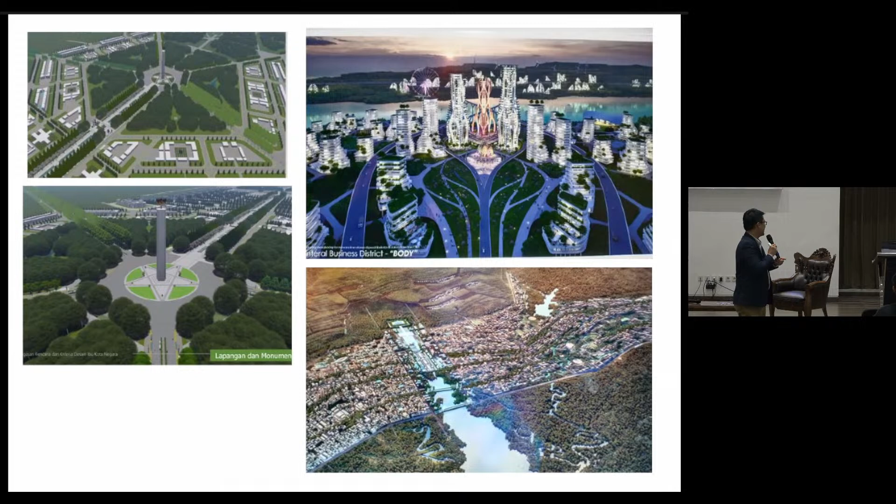Top right is actually a collaboration of Cornell University with some company in China and a university in Semarang, not Undip, the Catholic one, Soegijapranata. But there is Cornell there. And the bottom right is associated with Harvard University.

But who's the winner? Coming from ITB only, Indonesian national. So no help from foreign universities or anybody. So proud, an original national product. We're number 1, number 2 Cornell, number 3 Harvard. Although my master's degree is from New South Wales.

Okay, but what can you tell about number 2 and number 3 and number 1? Anybody want to give some opinion? Can you observe? Can you suspect? What is the difference? The brief is the same. Can you point out what it is? This is like a game, guys. Find the difference between 1, 2, and 3. This one is a huge difference. Any observation? Cannot find?

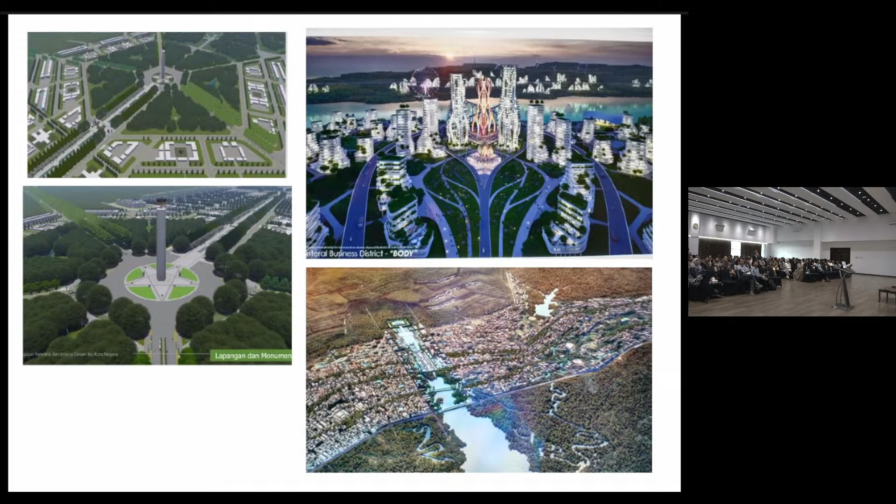Thank you. So if you notice, good observation, the one on the top right is flat, has a river, high rise, right? The one on the bottom is probably undulating, has a river, but very low rise. This design is in between. So this is a lesson that I can relate to all of you. In architecture, the same brief usually ends up with the same volume or the same shape. The design can be different, but the density, height, size, and dimensions are usually the same.

In city planning, the same brief can end up very different. So it means the competition is so open that it can really go for very different solutions. Now, can you tell which one is actually the better solution? And why did the judges select my scheme compared to the other schemes? Because the rendering looks better, probably.

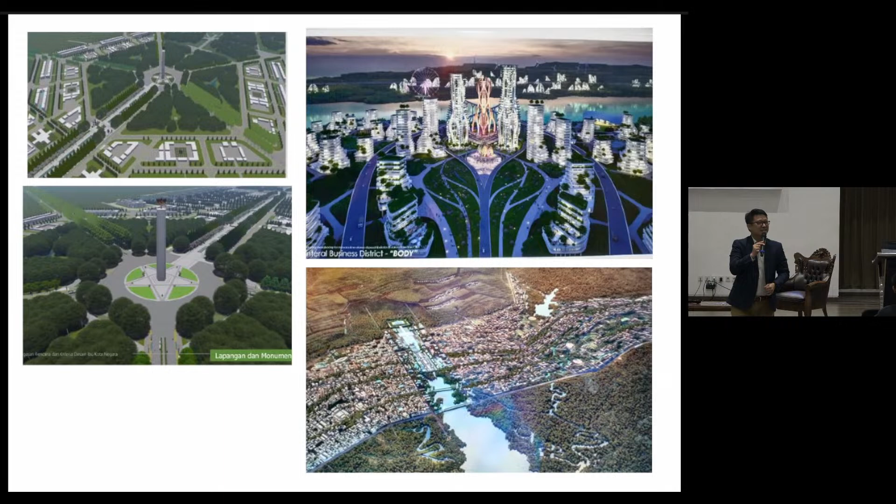Ngaku ya, saya ngaku, I confess. I was in an international company called K.H.A for 11 years. And primarily I spent my time outside. More than half of that 11 years, I was in China and Hong Kong, in India, in Singapore, and doing a lot of projects also in Malaysia. And my specialization is competition.

So when we did the project back then, that rendering was done in 3 days. 3 hari, 6,000 hektar. And the only company on earth that can do that is in China. Indonesia teman-teman kita gak sanggup, dan kita hanya punya 3 hari karena kita pindah, we changed location at the very last minute. As usual, architects are always like that, right?

We procrastinate, we never settle for final in the first week. No, we waited until the very last 2 weeks, we changed location. We changed location because all of us said this is not good. I want to see the ocean, I want to see the access to the bridge. Then we only left 3 days for the renderer. But we paid a very healthy fee for the Chinese consultant to do this rendering. So maybe the rendering helped us win the job.

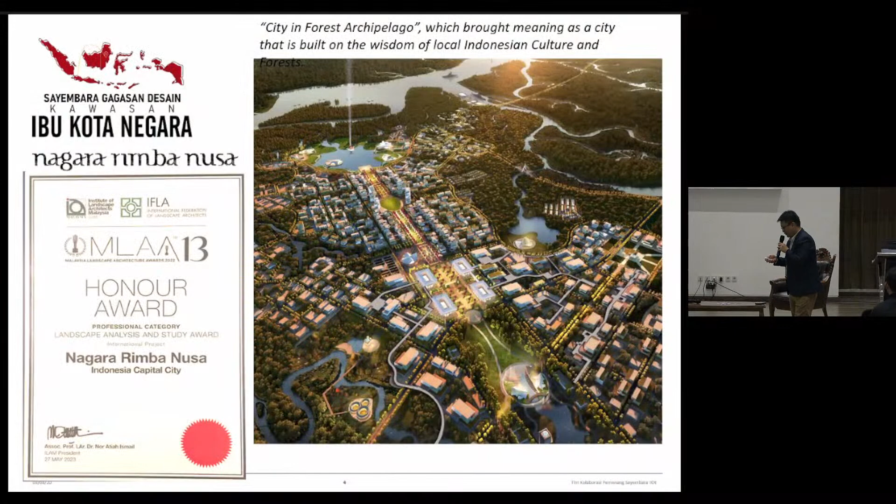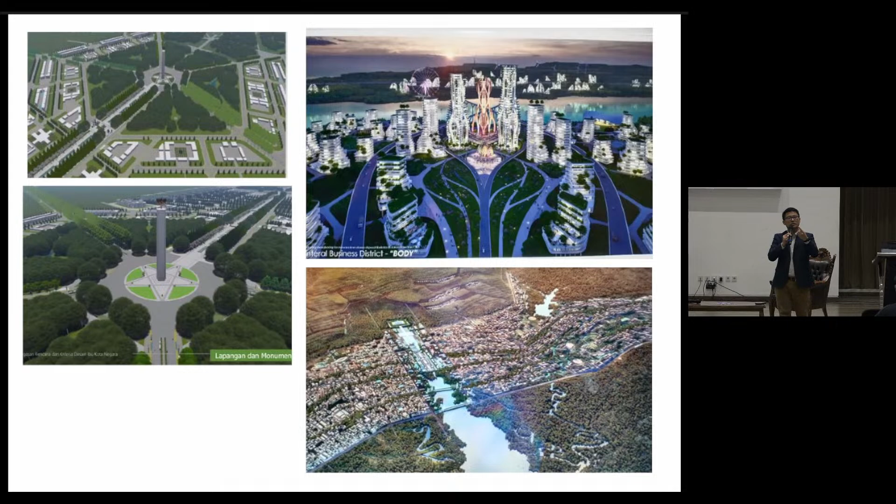But this one is also not bad, actually. So the point is, there are many options in relating to the brief. It doesn't mean it's only one solution. This one can be right too, I don't know. The other one on the top also can be right. We don't know. But our scheme is more about doing a medium density, and I explained to you why we chose medium density over high density or low density. Okay, I need to speed up a bit.

For those who know IKN, it is 240,000 hectares. It's the size of Jabodetabek: Jakarta, Bogor, Depok, Tangerang, Bekasi. There are many cities. Similarly, in IKN, we also have 9 cities. But the very big difference is Jabodetabek has about 34 million people in total, including Jakarta. Here, we only have up to 2 million. If we combine Balikpapan and Samarinda, it becomes almost 4 million. 4 million versus 34 million, very different. So we are not building Jakarta here.

We are building multiple cities: government center, economic center, health services, entertainment, education, innovation, agriculture, farming, and high-tech industry in multiple locations. And somebody may ask, why don't we build here or there? This one is mostly an area of mangrove, Teluk Balikpapan. This area, from the Suharto time, is called Bukit Suharto, a protected forest that cannot be touched. It's a national forest. It means 70% of the whole area is actually located here.

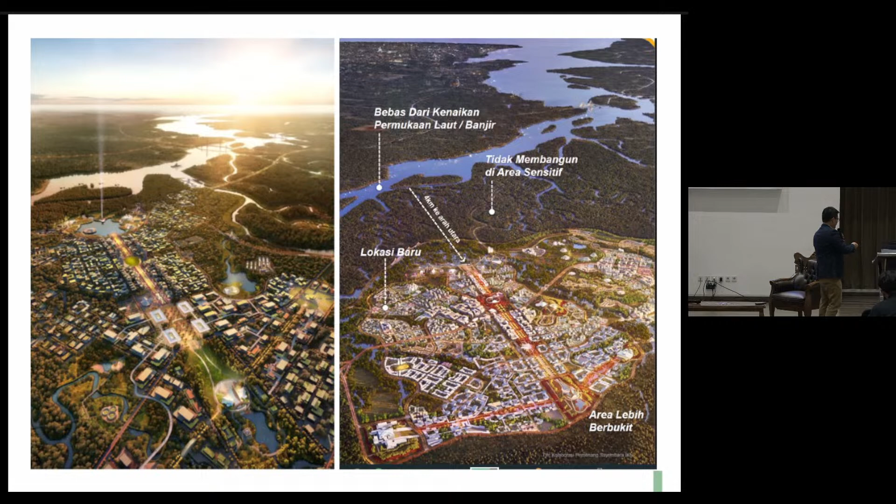So imagine my COVID quarantine time, I had to deal with all these changes, like you make an impossible city, right? So this is the thesis of my discussion. There are two, and if we have time, probably three. How to interpret the vision, the goals, and the targets. How to respond to nature and the context. What will be the model for urban development of IKN? How can we meet all the KPIs, although they're contradictory? I come back to the contradiction.

If you want to be closely located for 10 minutes and have efficient public transport, you cannot have more open space. If you want more open space, you're bound to be disconnected or segmented, right? So all this contradiction is the question that I have to answer.

And then to make it worse, that's the landing station of Pak Presiden. That's Pak Jokowi here. These are all the ministers. This is Ibu Dirjen. This is Pak Menteri, Pak Basuki, and he's pointing to this hill: that's my palace. Because from there, I can see Jembatan Balang is actually located there. This elevation is 110. The helipad is at 110. The palace is at 90.

The whole area here is like a bulldog. You know the skin of the bulldog? Kriwilan, bumps, like crazy. Every 100 meters, you go 30 meters up or 20 meters down, everywhere. So we ended up with a solution: first, we come back to our credo that we have to respond to nature. We have to be sensitive to the environment. How? We have to at least identify the high points and the low points. So never in the history of urban planning have we started from scratch.

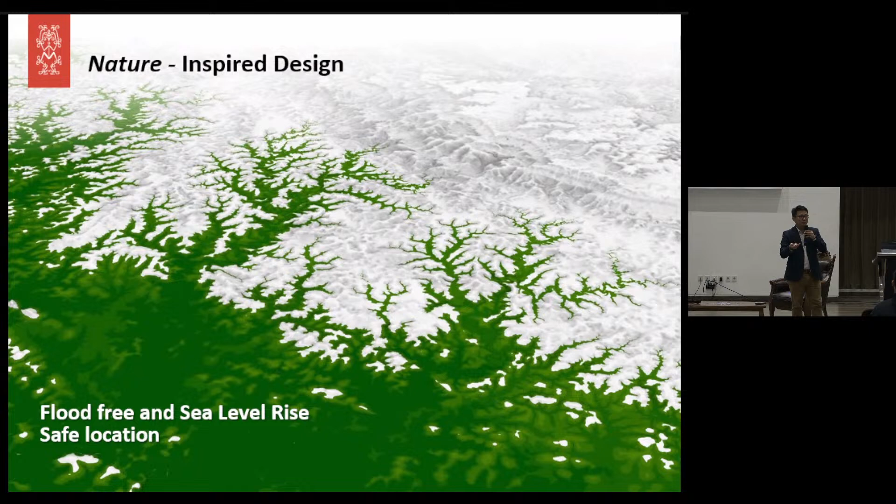This is the first time we painfully identify the main river, the secondary river, the tertiary river, even to the four category of what we call the vein or serabut sungai. It doesn't have any water, but it is an area that we don't touch. And that also has consequence to the road system.

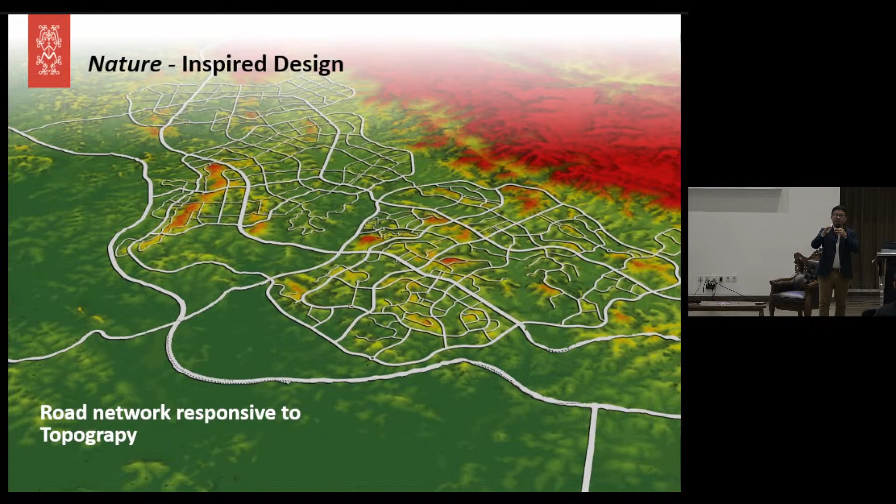We cannot draw straight lines. We can, but we're forcing it. So most of the roads are wiggly like this. Even this road right now has already become very wrinkly. Why? Because every time you go straight, you hit the hill, you have to go around it. You cannot cut the hill. If you go down too deep, you have to build a bridge. So if you really want to avoid unnecessary cut and fill on this...

That's why the road system is very undulating. But then, what is a capital city without the structure? We need to have structures. We start to have at least the axis, because the president already pointed out this location. He was here during the helicopter ride, and he looked down to here.

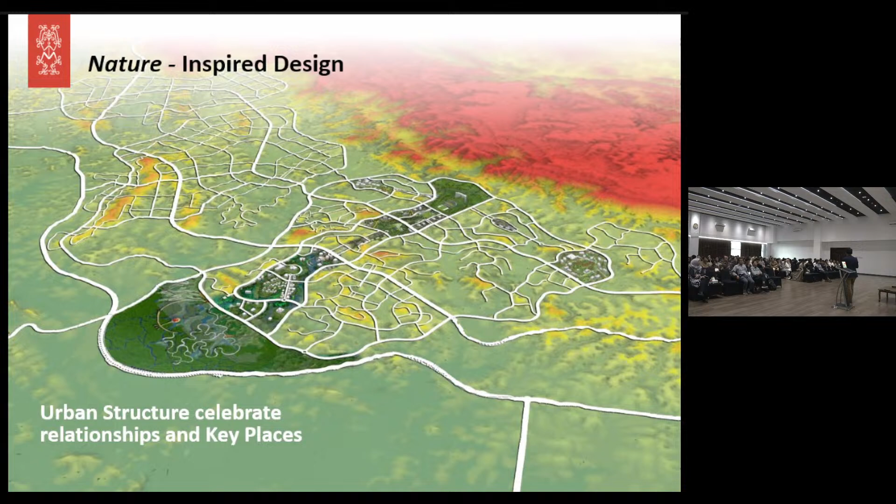And then we have to do an axis, because in our Nagara Rimba Nusa scheme, one of our features is the axis. If you look at this tradition of capital cities all over the world, it has an axis. But this is not copying from outside. In Yogyakarta, we have a philosophical axis from Merapi to Kraton and even to the Southern Sea, Laut Selatan. Bali also has that in Mount Agung. Bandung also has that in Tangkuban Perahu.

In many various cities of Indonesia, this is a relationship between man, nature, and the higher being. We call it God, but some people think it's not necessarily God, because in the past it wasn't really God, it's also the element or force of nature that you cannot control, something higher, beyond human, that really needs to be acknowledged. Although in our capital city we don't have a mountain, we have the hill behind us, which is an elevation of 200.

So we built this in one location we already know. Pak Presiden wants the palace to be there. We relate it to the ocean, this is the Teluk Balikpapan. This one is actually a wetland, and anything in between is where man is supposed to come in between nature and God, and really try to set a balance between how man treats nature and how man relates to God. So that's the axis that we want to build.

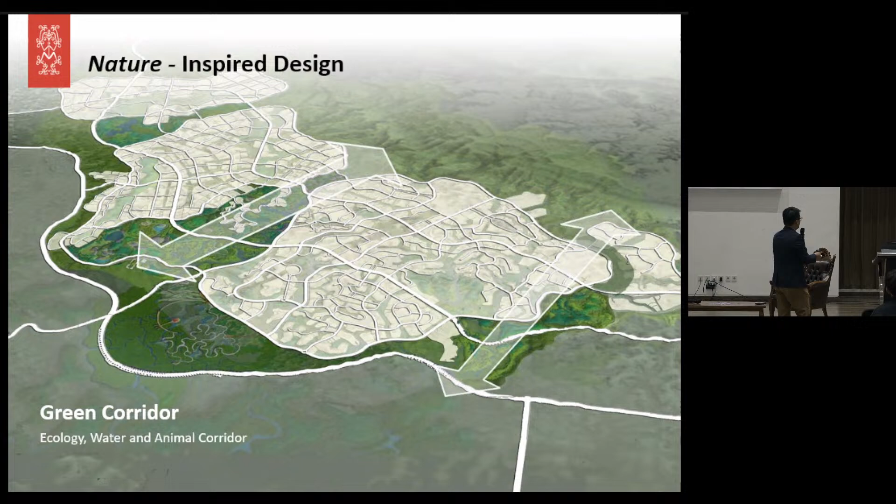Because remember, we need to be side by side with the snakes, the monkeys, the biawak. Do you want to be too close to them? Maybe not, right? So we add at least a 100-meter wide corridor to allow the animals not to be disturbed by us. By right it should be 300 meters, but we don't have the space. We need to build a town for 300,000 people in only 30% of this very precious area. And not to mention, the area is very undulating, so a lot of it cannot be built.

And remember, we also try to remember the first nerve system of the water. We painfully identify this area that we don't build on.

In the city of Jakarta, even Yogyakarta, you can only have probably the primary and secondary river. The tertiary and fourth level is usually gone - we fill it up and use an irrigation channel. Jakarta lost their tertiary river since the 1970s or 1980s. I don't know about Yogyakarta, but Bali is already losing that. From here, we define and protect even the fourth level of river.

Which you will later see how crazy we are doing that, because it drives us nuts also doing that. But remember, we have to do 30% developed area and 70% green area. The 70% is made up by the big corridor of nature and also the small little corridors of what we call the green and blue fingers.

And remember, there's another KPI about 2 degrees Celsius. Can you guess the relationship between the 2 degrees Celsius and these green fingers? And also the 10-minute city, because the 10-minute city suggests that you also have to achieve not only Indomaret, but also the park. So can anybody guess the relationship between the reduction of temperature and this network of fingers?

Kira-kira ada yang ide? Saya kasih USB deh. USB isinya file presentasi saya.

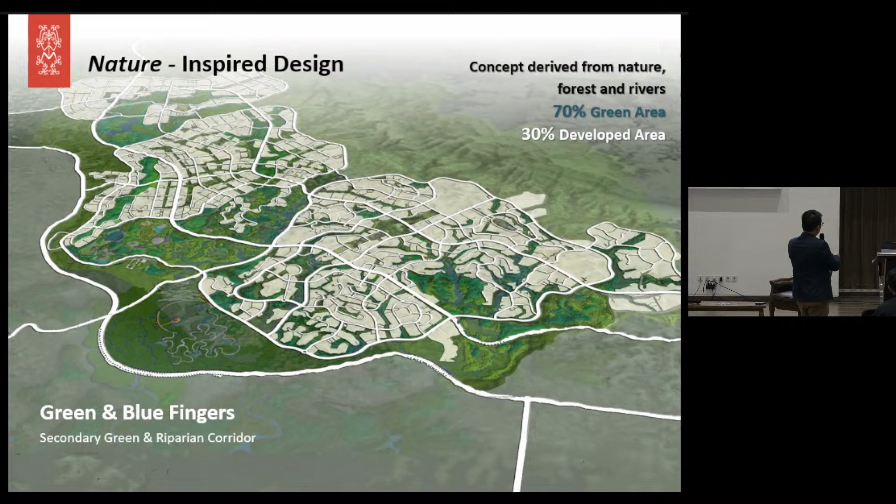No answers? Okay, so these fingers are the manifestation of our archipelago idea. When you are on the island, what do you feel? When you are on the coast of the island, on the beach, what do you feel first? Breeze, right? Yes, the winds. So if we surround our yellow development area with a lot of this green, imagine the green also carries oxygen, carries the water, and allows the breeze to flow.

So it helps to ventilate the city in hope of reducing the temperature by 2 degrees. I cannot answer exactly whether it will be 2 degrees or not, because this temperature can be 40 degrees Celsius as we speak now. With additional buildings, it could be even 42. We don't know. But with this system of what we call the green fingers, hopefully it can drop the temperature by at least 2 degrees.

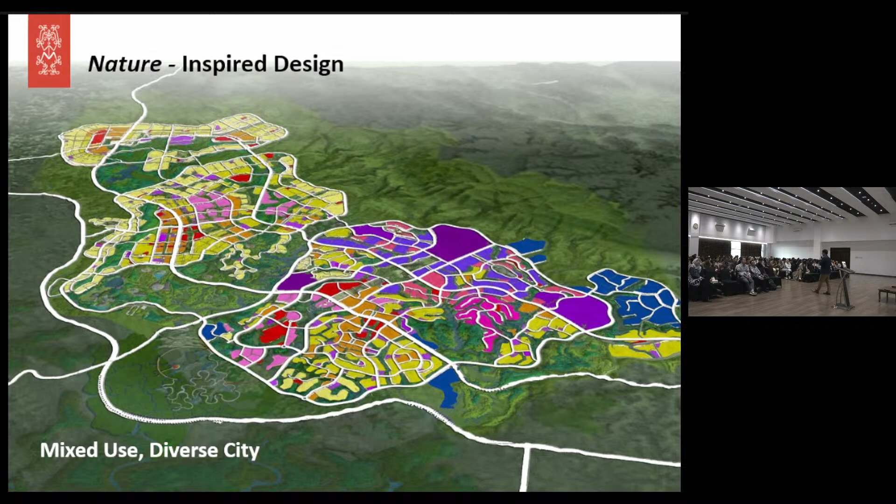And then the next move is the mixed-use diverse city. This is what we call a land use that is mixed. Usually in planning, in the zoning - zonasi, teknik zonasi di PWK - we separate between the living, which is yellow, and the working. Working is usually far away. We live, for example, work in Jakarta, but live in Bogor, live in Depok, live in Serpong.

In here, this is the palace, this is the government center. The yellow one is really next to each other. This is something you notice in all capital cities in the world - the first criticism of the capital city is about how soulless it is. If you go to Canberra, boring, it's like nobody is there, especially after office hours. All the government people move out from the government precinct and the area becomes dead. You go to Putrajaya, very empty during the day and during the night time. The living place is busy, but the government center is very empty.

So in here, we try to mix, and we also try to break the tradition of not having residential too close to the government center, because the government center usually has a lot of restrictions - you cannot go there because we have a lot of secrets, a lot of safety issues, we don't want you near us. But I'm not from the government, so I take the liberty of mixing them, so you have houses near your ministry office. How about that? And now they are building it, so I don't know whether they realize it or not, that actually I'm mixing the residential more - but for a reasonable purpose, trying to bring life to the area that is very government-centric.

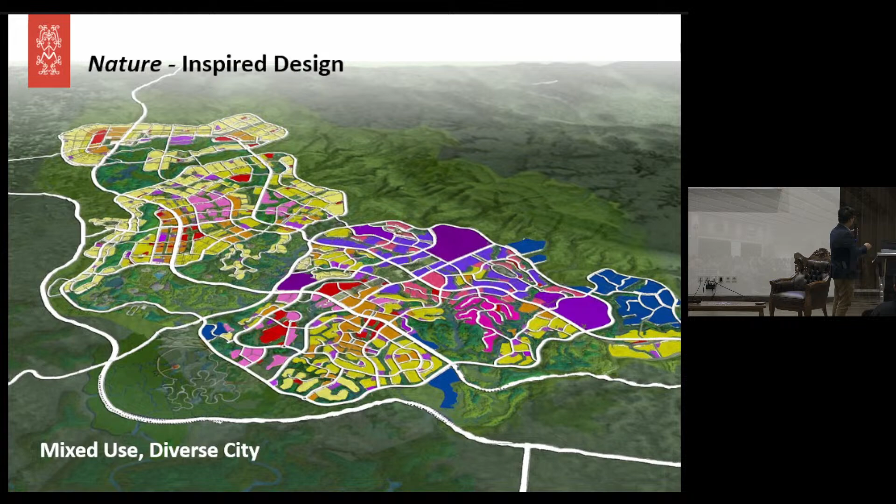Hopefully within 10 minutes, you can go from office to home, or vice versa, or if you're near the commercial center. This is where the contradiction I was talking about comes in: 70% green area, 10-minute basic facility access, 500-meter walking distance to transit, 80% public transport modal share by 2045.

How can you achieve that if you have 70% green area but it's so separated? So we came up with the idea of striking a balance between density and optimal walking distance to transit. We really put a lot of emphasis on public transport, putting in a busway system that reaches all areas of living and working.

Then we put in the transit nodes, where the bus stops are. There are hundreds of bus stops in the capital city, and each bus stop has a 10-minute city radius that is walkable. In the capital city, in Jakarta, on flat ground, or in Yogyakarta, 10 minutes, how far can you go?

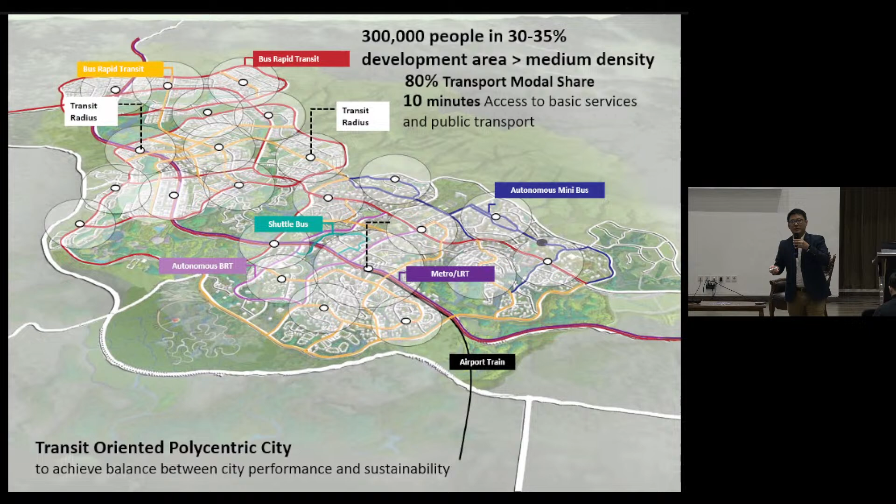But in our capital city, which is undulating like crazy, we can only walk 200 meters. So the radius becomes very constricted, meaning we have to have more public transport points.

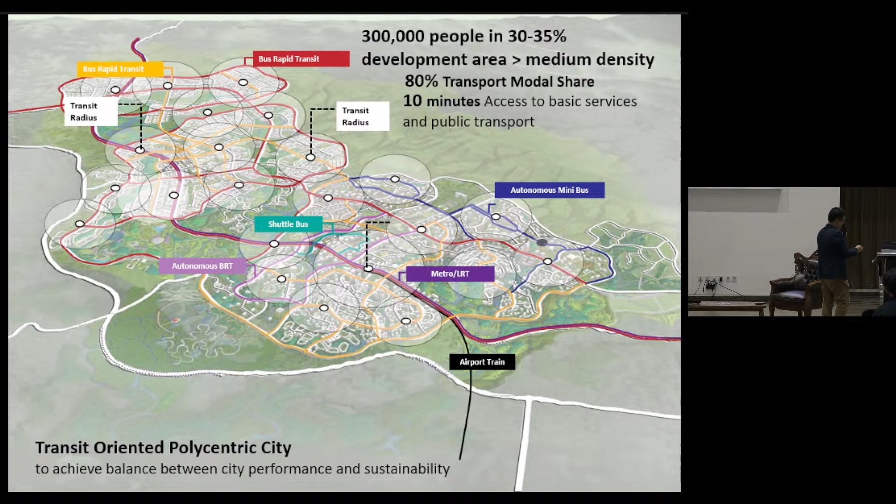How do we make it work with density? In the principle of transit-oriented development, you densify around public transport. You put more people near transit than if they are far away. It means you cannot make it suburbia.

Remember the third winning option? The third winner is very flat, like 2-story, 3-story buildings all over the place. We cannot do that because we need to build density.

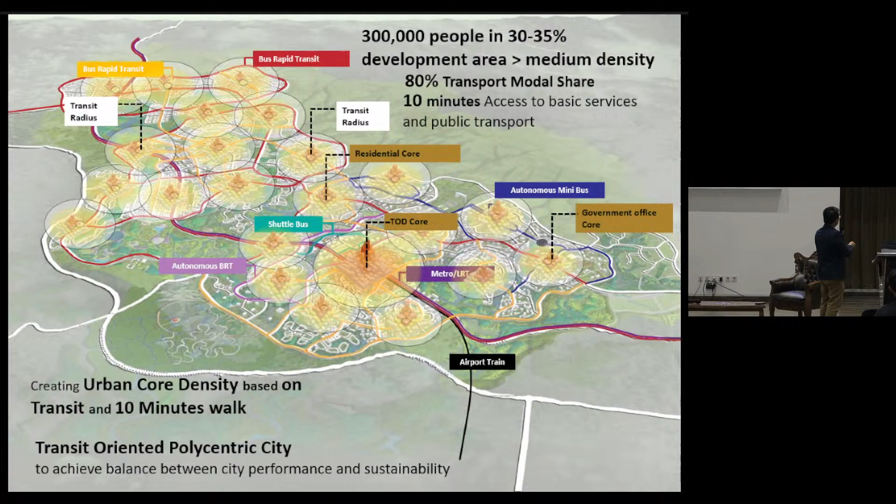So we are building density around the transit, and we call it 10-minute clusters or livable clusters that allow people to walk more, bicycle more, use public transport, and use cars only as a last resort. We also have to connect the bus station to the living area, the working area, and the mixed-use area using direct pedestrian bridges, because the area is very undulating.

Just to add to the third pillar of the vision, you have to be smart. We can't show too much of this, but the discussion this morning talked about integrating a platform for commanding and controlling the city using an integrated model, almost like a BIM, but at the city level. So we call it not BIM, but CIM, City Integrated Model.

It needs to be big, covering the whole city. It needs to be almost what we call a digital twin. In Singapore, they already started to mirror their city, put it into a model, and monitor the performance of each area of the city from wherever they are.

Here, we don't have the city yet — we are building the city. It means we have to start very early, putting everything into a digital platform, making sure every single movement is recorded and integrated into the platform.

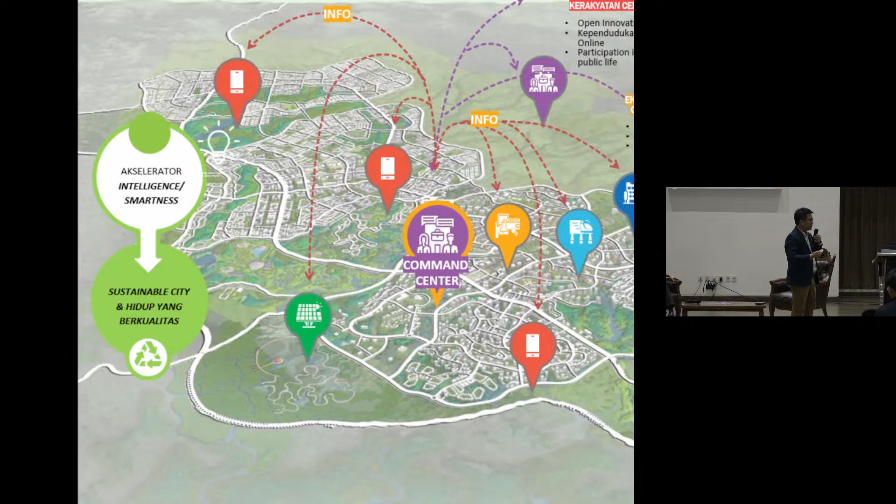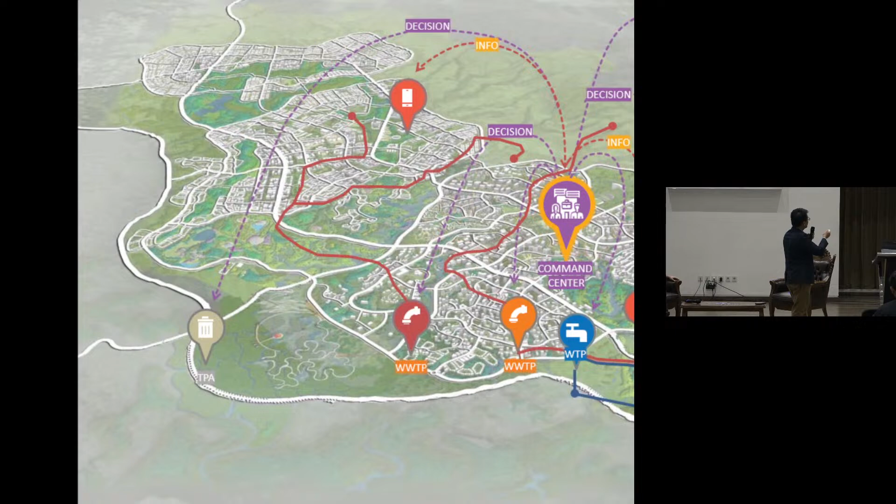The performance of the building, the water, the infrastructure, the energy, the waste — all monitored and controlled from one point of location. Especially the transportation system, because our KPI is translated based on the movement of people by public transport.

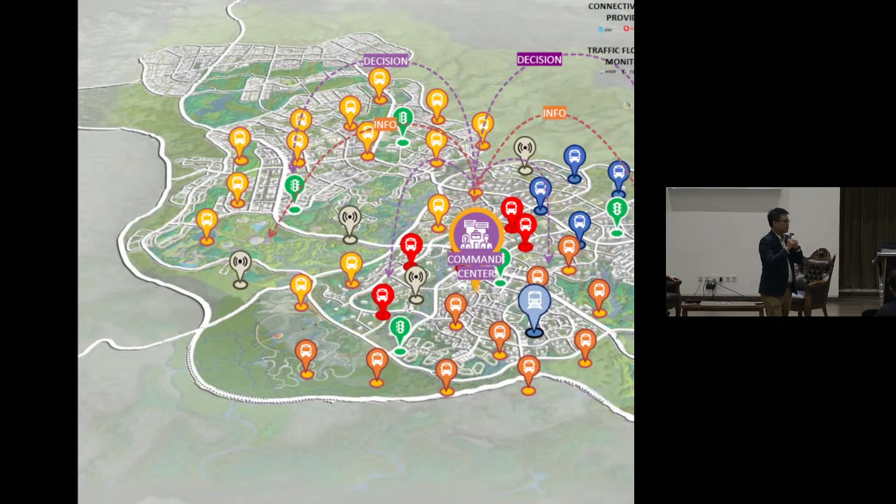If it's measured by public transport, it means it needs to be reliable. What is the bad thing about our public transport?

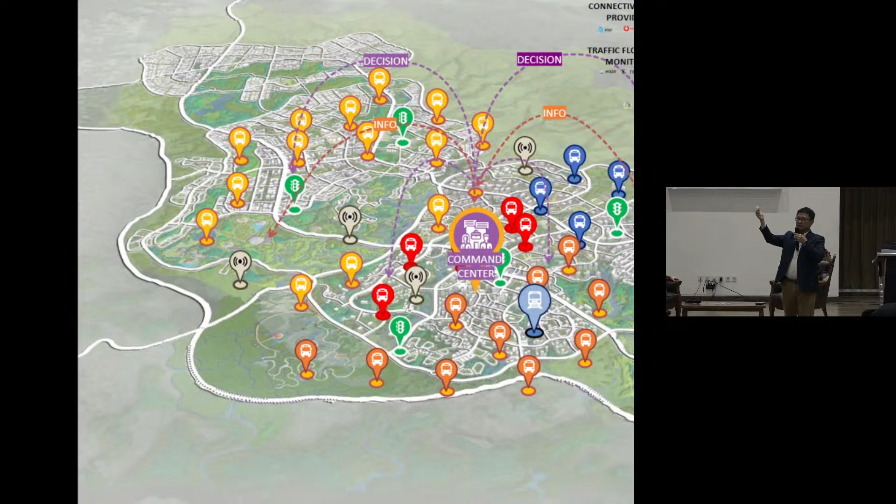Because that's the age of the smart city in the future. You just don't let the car move around endlessly without knowing how many people are going to use it or not. If everybody is using apps and they start to say, I need the bus in this location, there are more people. Especially they can learn; they have machine learning to know the pattern every day, like, oh, the government people in this block usually come from 7 to 7:30, and they will leave back again from their offices about 5 o'clock. The bus system can adjust to that requirement. So that's the age of our capital city in the future.

So smart forest city, archipelago-based future city model as a transformation and symbol of civilization advancement of Indonesia. Now,

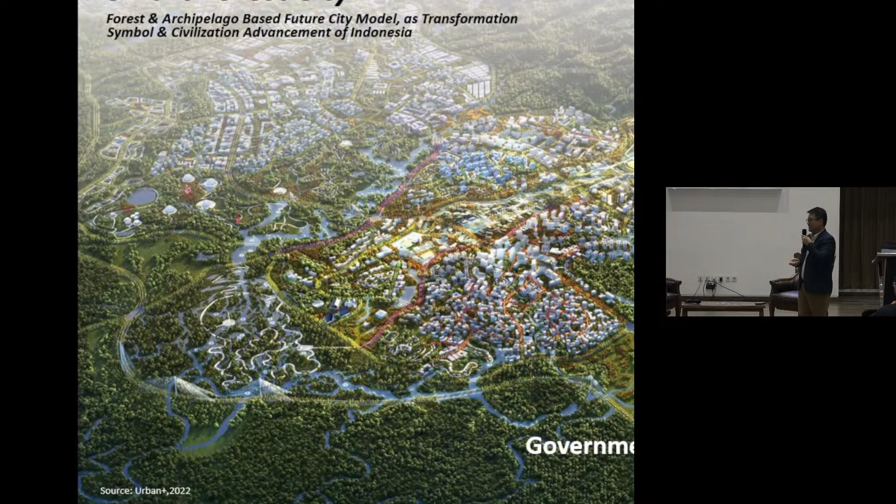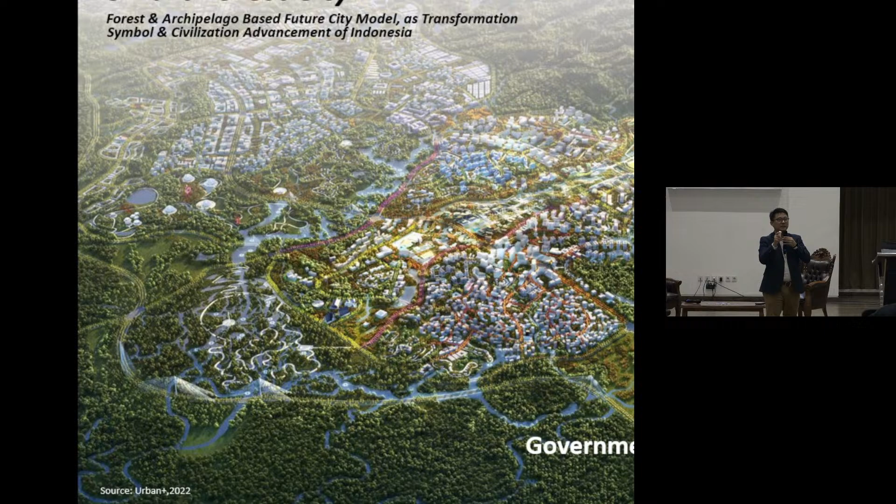Yeah, okay. Just now we talked about the big scale. Now let's talk about the building blocks, something that relates to architecture a bit more. How to design a sustainable urban form that really pushes the thinking forward. Even the words biomimicry and biophilia are already coming. This is what we call the nature-based solution approach to the city and to the architecture that really tries to be inspired by the forest.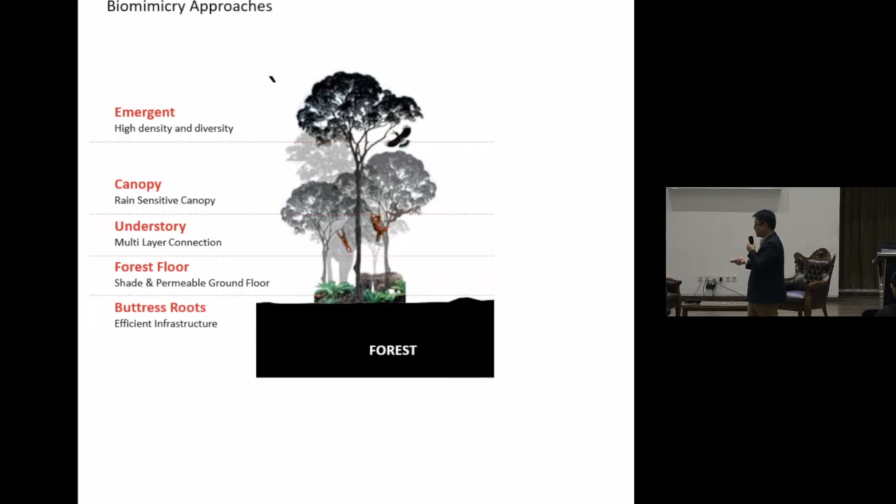So not only the park, we're talking about forest. It means it has big trees, it has small trees, it has monkeys, it has birds, it has squirrels, it has the snakes, and we also have the system of buttress roots, forest floor, understory, canopy, and emergent. What we tried to push forward at that time, although the implementation may not be like that, but that's the challenge, is to really try to emulate nature into the city fabric.

Try to see the tower of the building as if it is a tree. Looking at the people as if they are the monkeys and the squirrels. How do they move from one to another? Does a monkey go down to the bottom of the building, get checked by the satpam, go out and then go to the other one? They go from one building to another by swinging from one tower to another. Why don't we create bridges between the buildings so I can connect from this building to the next building without even going down to the ground floor?

Break that boundary. Add more solar panels on every rooftop of the building as if they are the emergent tall trees. This is where the biggest trees are, because they have the biggest capacity to absorb the sun's energy. This is the trunk. The trunk takes all the water, the nutrients, the sap from the ground very efficiently. Can we make a very efficient vertical core of the building that can not only take people, but can also take water, energy, information, logistics? Goods can be transferred from top to bottom.

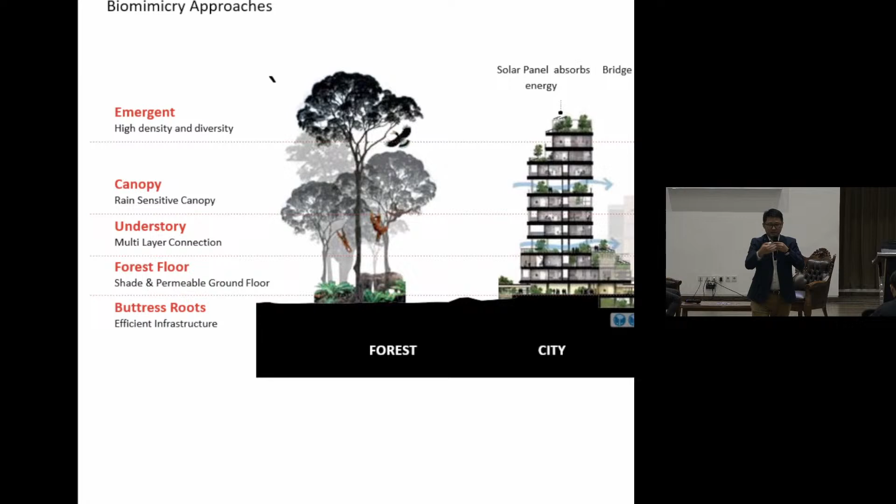The bottom of the forest is where it is most diverse. By the forest diversity index, they are not diverse at the top. They are the most diverse at the bottom. More species are located at the bottom of the forest, not in the middle or the upper. Yeah? So can we bring more people, more activity at the ground level, and also allow the water, the wind, the animals to move freely from one place to another?

And yet, the root doesn't care whether you are on the hill, it doesn't care whether you are on the slope, it doesn't care whether you are on the water. It grows, it adapts, it connects from one to another. So why don't we adapt to this contour by creating multiple layers of pedestrian connection that can connect directly, but also help carry people from one place to another, although they have to go up and down. And this is not the first time; Indonesians in the past also adapted to that.

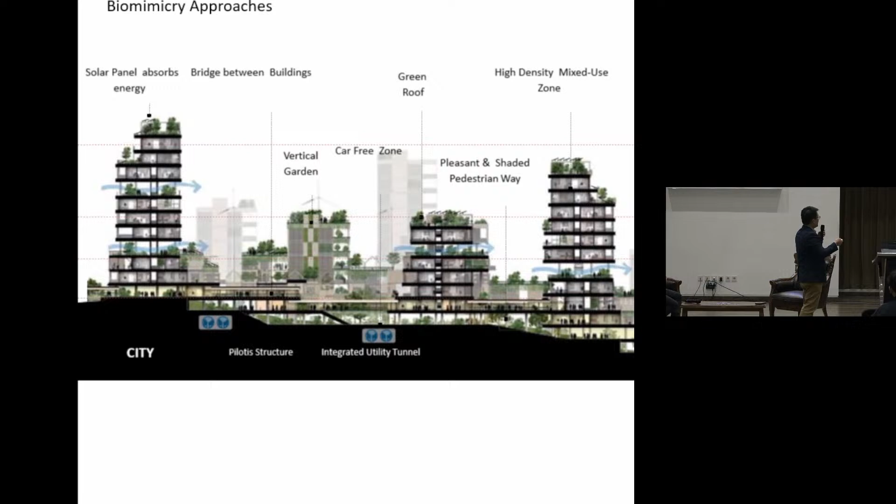This is the Rumah Panjang of Kalimantan. But the Padang people also have this. Aceh also has this. Toraja also has this. It's our Nusantara architecture. Our past vernacular wisdom of architecture gave us the clue on how to build in response to nature, allowing man to live on safe ground and the animals and nature to also occupy the bottom by using stilts. So we can also mimic using stilts, so we have less impact on the ground, less building footprint, but then we float, allowing the wind and the water to pass through, allowing also the temperature to go down.

So I'm going to tell you about the first block of the building in the capital city, which is the ministry building, where we have these 5 principles. First, we make the ministry building adaptive to the contour and multi-access. So you look at all the buildings here, they have to be built on the slope. Yeah, we use stilts. We build on the slope.

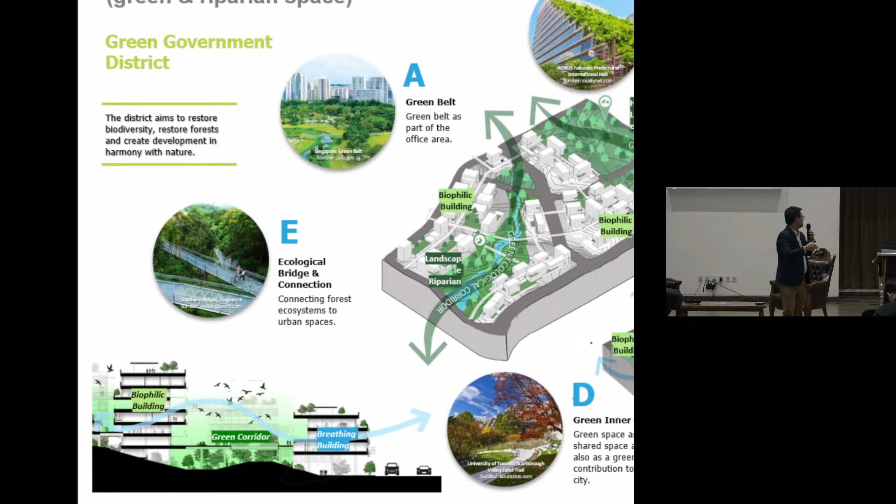We allow the corridor. Remember the finger, the green finger, passing through the blocks. This is where the water, the animals, the wind pass through. If we lift up the building using the pilotis, we call it pilotis, yeah? Then the wind can move freely from one area to another. So the building is not like a typical shopping mall where you isolate your facade and put all the air conditioning. So you allow the breeze to come in and out. And we can model this. I can show you later.

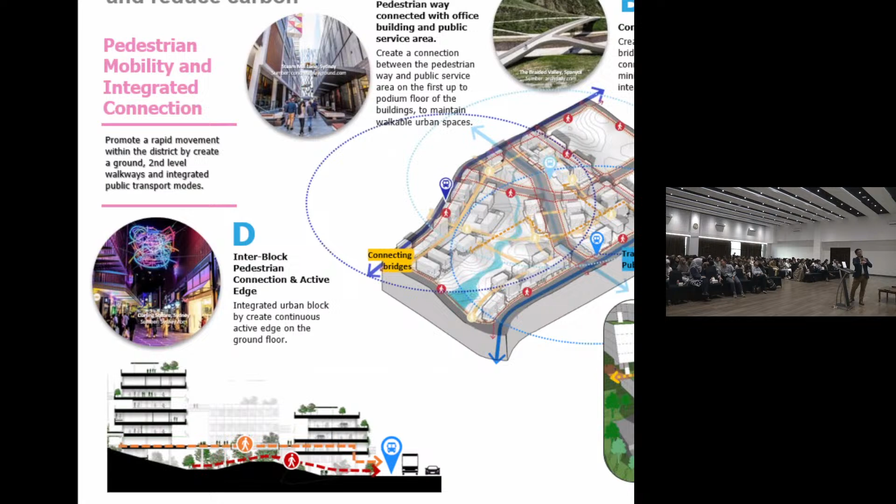And then we interconnect 3-dimensionally, not only using the ground level, but we connect from the bus to the second level that can take you to the ground level of the higher area at the back. Because you have a building that's probably 5 meters or 10 meters behind you that is taller than the first one in the front. And by lifting up the ground, people can move freely at the base, but also people can move from the second level connection. And this is what we call the 100 to 200 meter radius from the bus station.

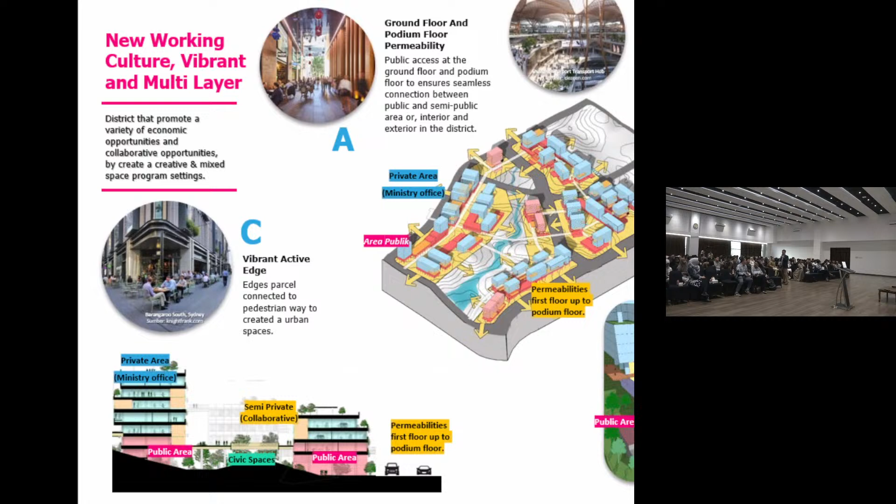Why are people lazy to walk in Indonesia? Sun, hot, rainy. That's the number one. Second one, naik tangga, going up elevation, males. Third, can somebody guess? The quality of the pathway is not good. If we can do the quality, especially if the lady in high heels can walk, it means you're good, right?

It means friendly to the asosiasi dengan high heels association. I don't say only women, yeah. It can be men too nowadays.

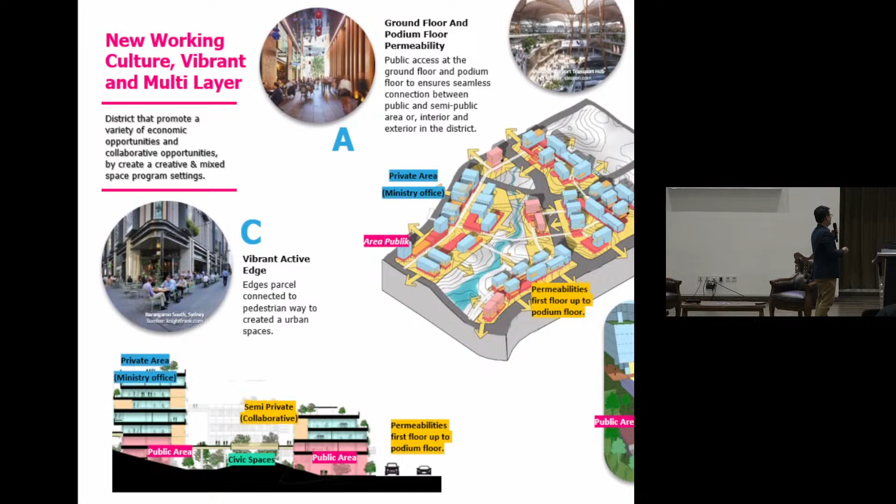So this is the architectural expression of the building after that. We have about 6 to 8 story buildings. The ground level is open, has as much penetration as possible, allowing the green and the wind to pass through. The public function is at the bottom, the semi-public at the second and the third level. The upper level is for the government.

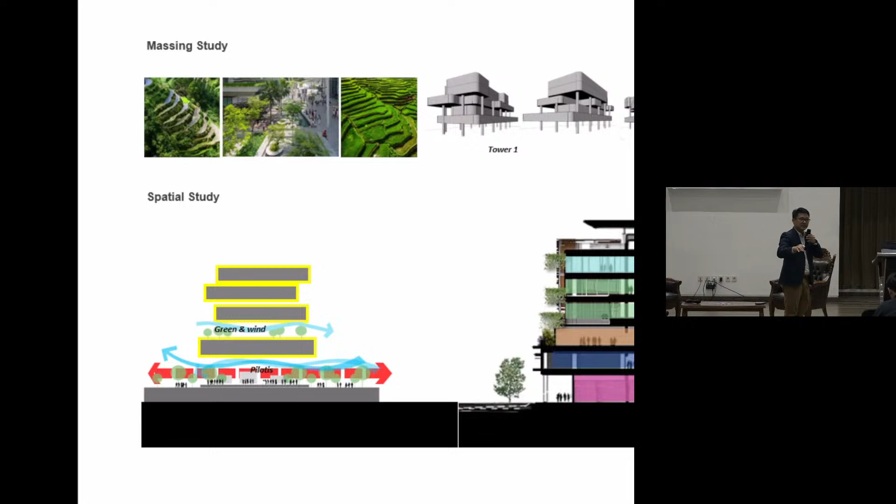We acknowledge the use of the government that is more private. They need to have a lot of secrets, a lot of protected data. But it doesn't mean you close from the bottom ground. You can allow the higher floor to be government zone, but the bottom floor and the second and the first can be liberated. And then in the Ministry of Kemenko, we also start to use the terracing of the paddy to be the inspiration of our architectural blocks.

Now let's see the manifestation of that into a design, ya. Musiknya kayaknya ada tuh.

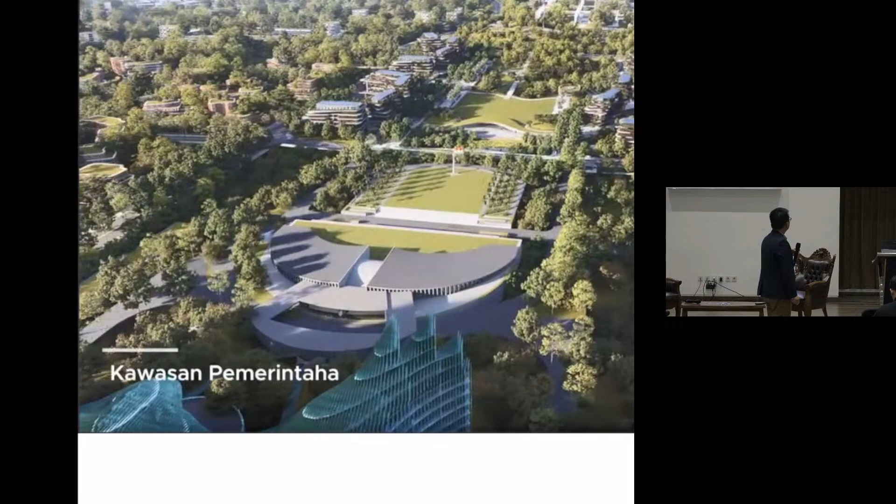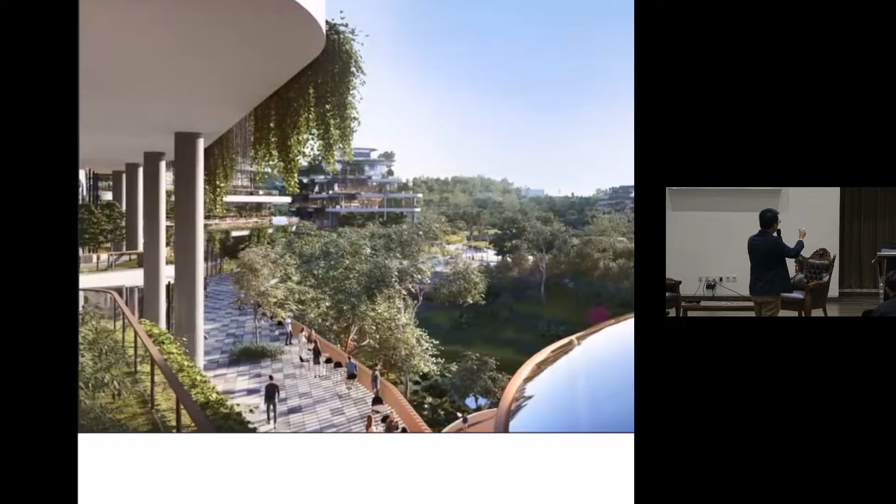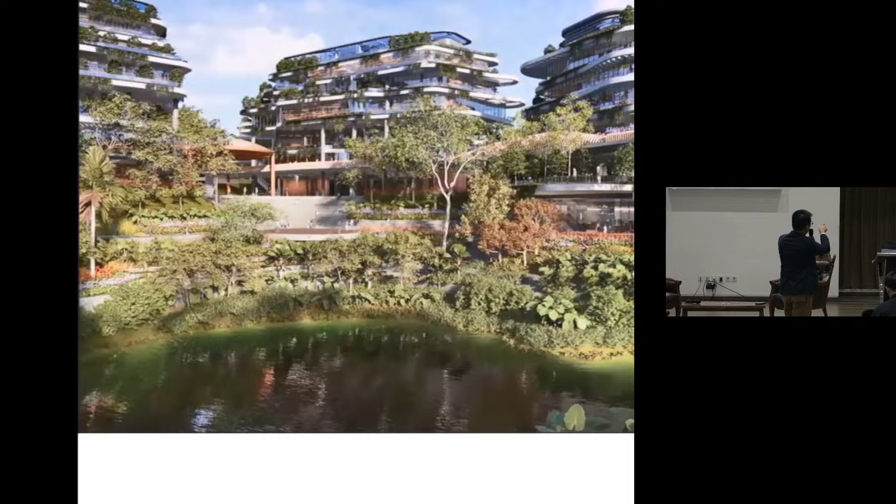So this is the 4 Kemenko that is undergoing right now. If you can see, the building has a lot of cantilever, a lot of integration between the green and the walkway. The walkway is on the second floor. The base of the ground level is open. People can connect from one to another. There is water, remember the water finger, the green finger and the blue finger. The ground level is also open to public. The connectivity happens on the second and the third floor.

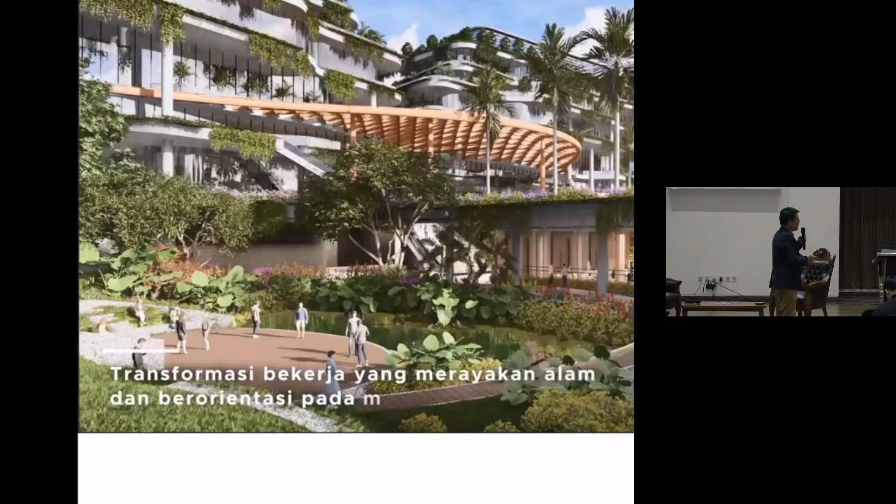We use a lot of openings. We use a lot of shading because we need to reduce the use of air conditioning. We use a lot of openings to let the wind come in. We use a lot of wooden or timber material. And we also use a lot of

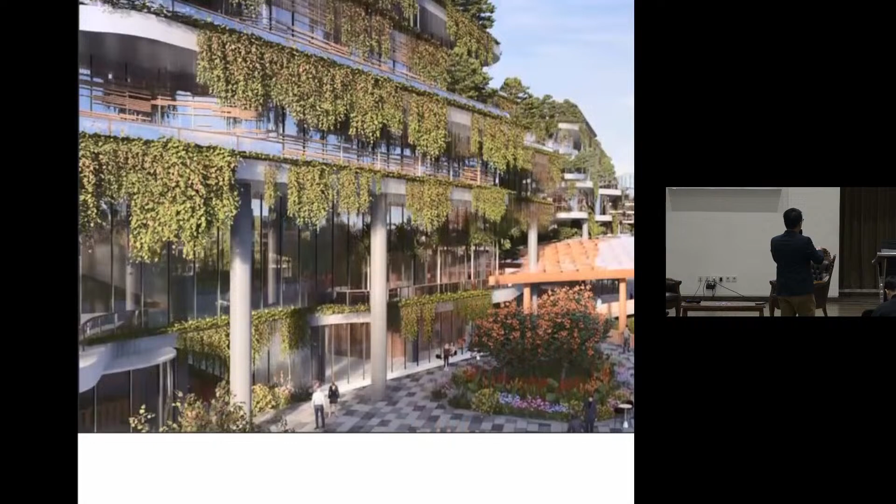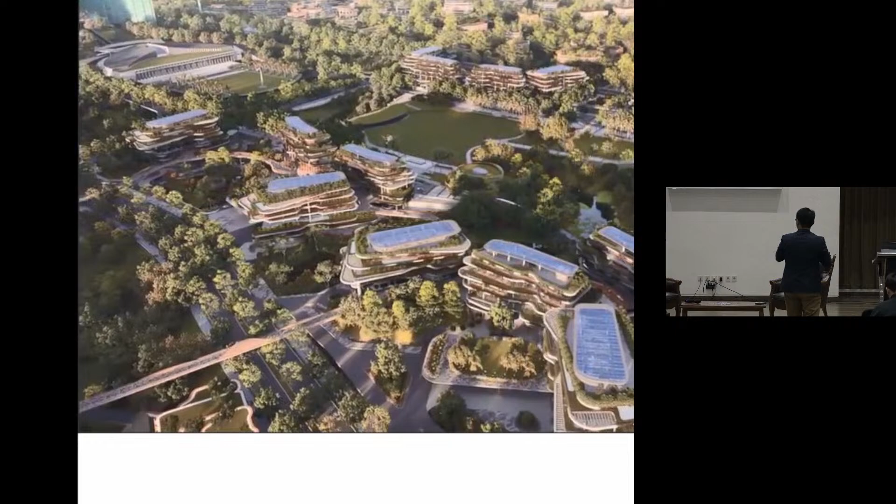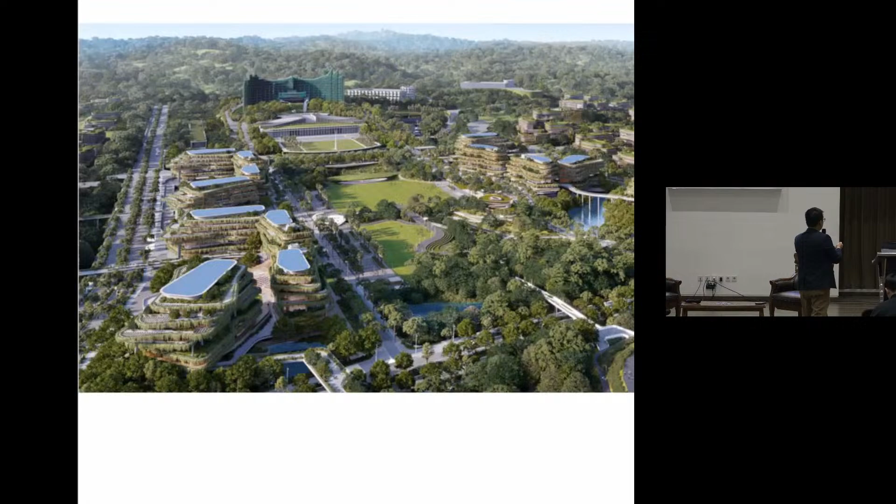sun shading, the facade, like in the past we have, ini ya, apa? Teralis gitu ya, bukan teralis ya. Tritisan atau apa ya? Itu loh Pak. Second skin, ya, the second skin usually made from timber that has the louver, ya, jalousie. So that's also our traditional architecture feature that can be used in the modern form. So from that, it starts to be built like that, and I'll show you later.

Do we have more time? You still want to continue to the next level? Ini SKS ke terakhir nih. 4. Bisa Pak? Okay, now this is the last piece of the presentation. After this, all of you can take a certificate. Lulus jadi urban design. This is the heaviest part though.

The first KPI that you saw in the very first slide has all the numbers. It's very specific: 80% public transport, 10-minute city, 2 degrees of temperature reduction, and it's mandated by law. We as professionals, we are not politicians, ya. We cannot just promise, Pak, 10 menit saya jamin. I can guarantee you 10 minutes if you elect me, right? I can guarantee it's a livable city, pasti bagus. That's not science, that's not us.

We are professionals, we are academics, we have to be using the tools that are available in our era, using parametric and modeling tools to guide the built forms and to guide the development of today that can also reach to the future. Because I can tell you, 100% alternative energy is not doable in today's world. We cannot do 100% yet. We are so dependent on fossil fuels until today. There's also another diabolical situation.

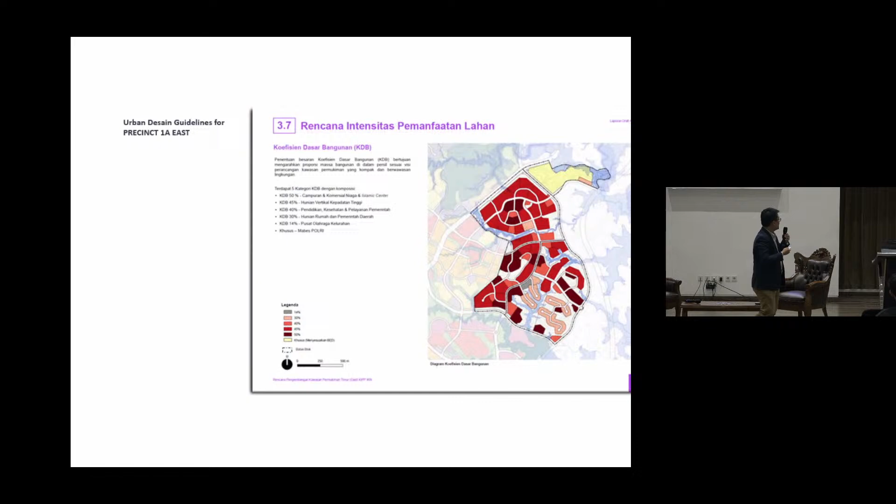So one of the options is to create urban design guidelines that are also performance-based. So this is UDGL. If that's 6,000 hectares, we divide it into about 17 small areas. We call them precincts. Each of these is about 250 hectares. Each is guided by the principle, guided by how much the density, just like a typical RDTR, or RTBL.

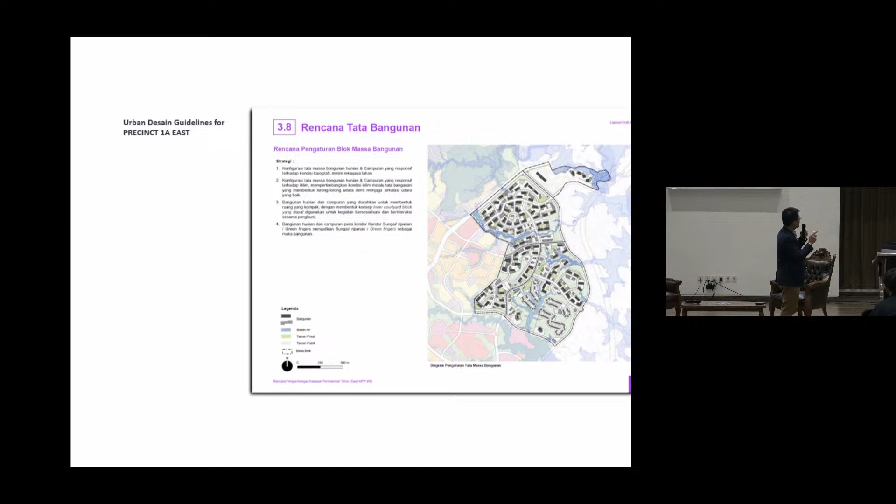What will be the block massing? Even the block massing is being simulated to match certain behavior of the solar orientation, the wind, the water management, etc. The road system is also being developed that way. Even the pedestrian level, even to the level of the second level connection. So we not only prescribe, we force the buildings to create this kind of network. Why we can have this network, I can tell you later on. But we even put that as a mandatory requirement.

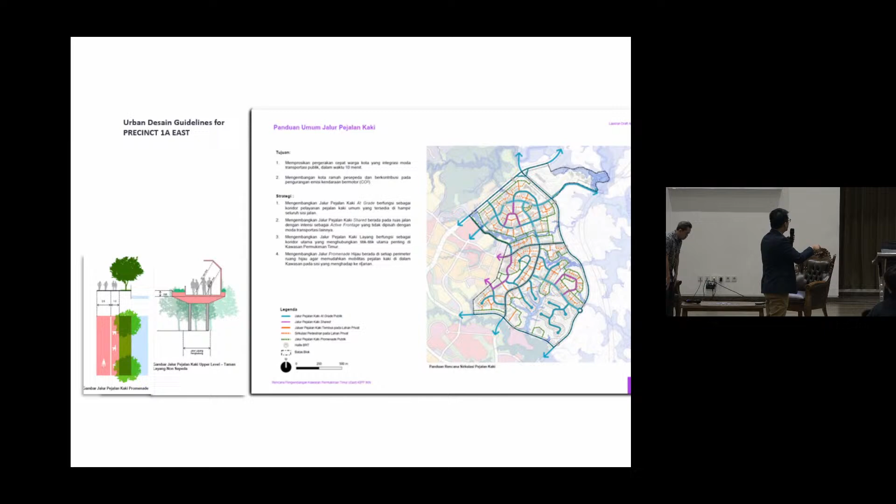So people who come into the capital city have to start following these boundaries, these guidelines. Also, we talk about the fenceless condition, the area that doesn't have a fence. We also guide what we call the edge of the building. This is Urban Design Guidelines 101, yeah? So when you do UDGL, this is what you're gonna do usually.

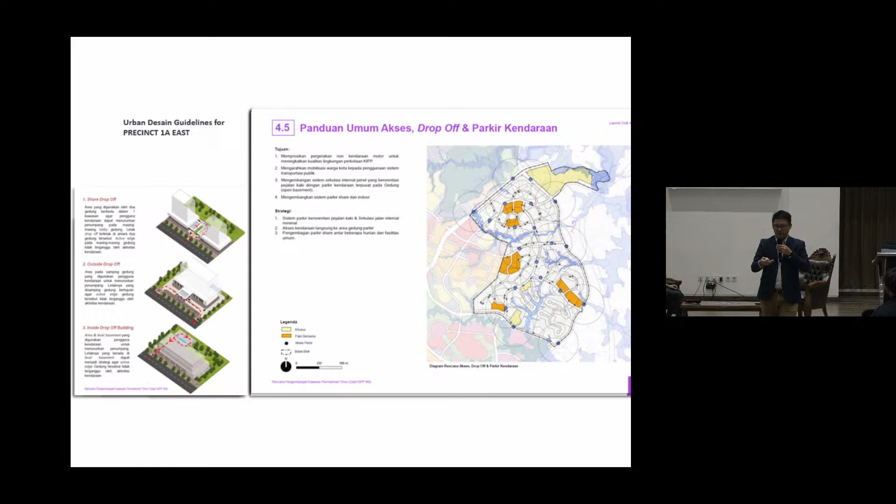We also calculate the drop-off, where the drop-off is, where the parking is, because the thing that destroys our city today is the car park and the car access. If you can switch the orientation of the building, putting the car park at the back and the building to the front, then you will have a more walkable city compared to our city today.

We also guide how the building relates to nature, how the building opens up to the river at the back. Usually the river at the back in an Indonesian city is a place for drying laundry, for dumping trash, for MCK when there's no toilet facility. The river is the backyard of our city, right? In here, the river is the front yard too.

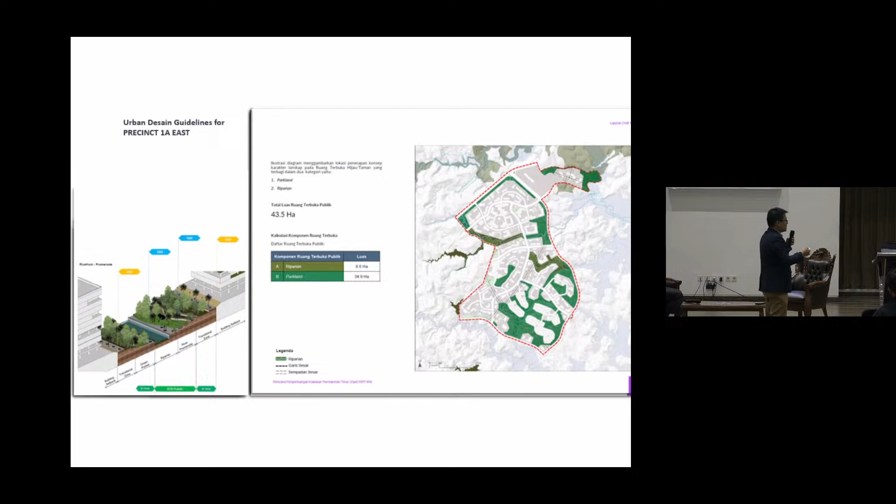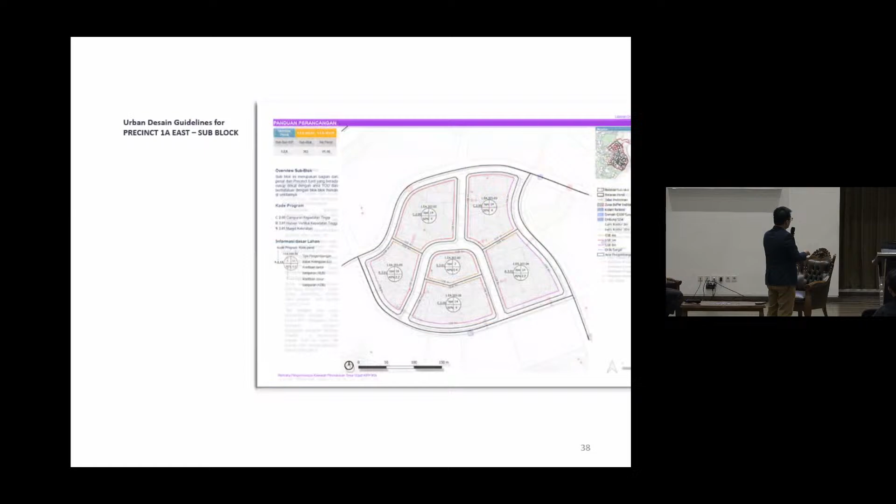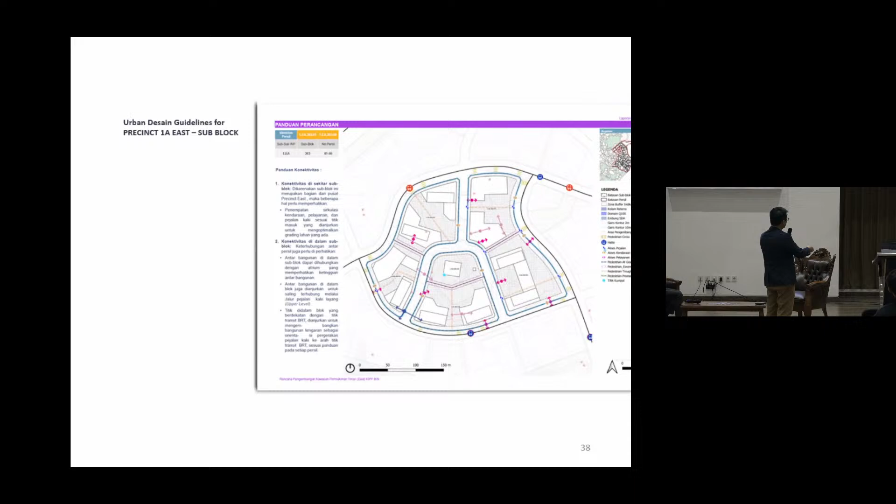So anybody who wants to build in the capital city really needs to change their paradigm. They need to change the way they work and operate in the city. And we already guide that at what we call the sub-block level. Even to the three-dimensional level, we already know the typical cut of this. We know how much the difference is between one area and another. Which area requires connection, the bridge, the connectivity between buildings, and also the language of the guideline itself.

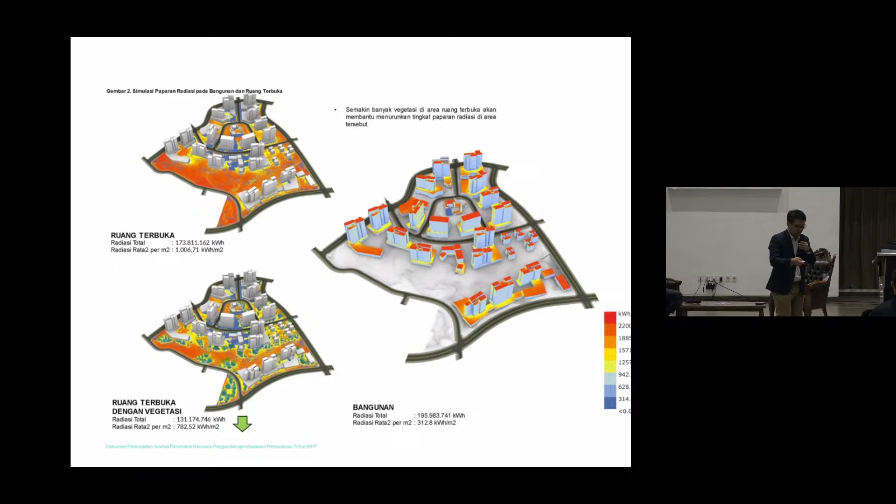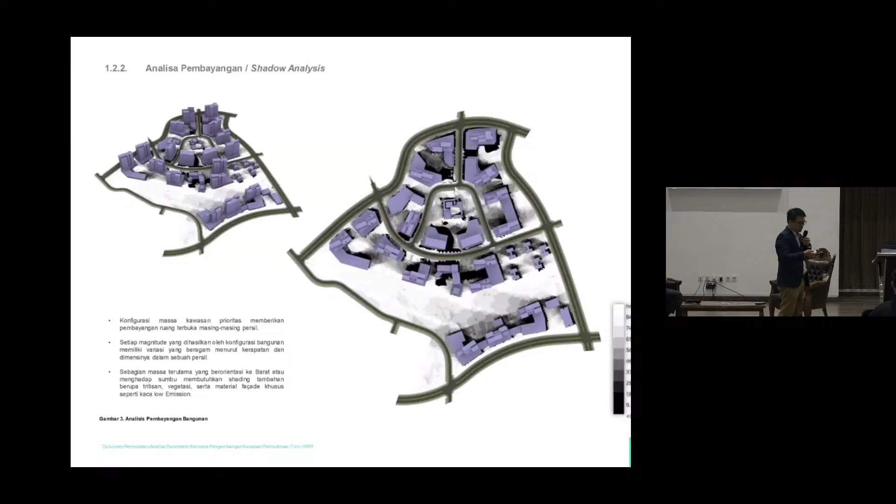We calculate this shadow. Remember, Indonesians don't like to walk under the sun. They like to walk under the shade. So if we can bring the buildings closer to create shade and shadows, it helps the pedestrians to walk longer. We also have the wind analysis. We know where the wind direction is in the Kalimantan area, especially this area. We create the contour modeling to make sure that the buildings allow the wind to pass through.

Remember the green fingers? If we put water in front of this, the wind not only creates a breeze, it also reduces the temperature of the surroundings by certain degrees. This is all physics, this is all science. Can we do this in the whole city? If you have a very good computer, interconnected, 20 PS5s connected, it can be. But my computer cannot do it. We can only do about 100 hectares.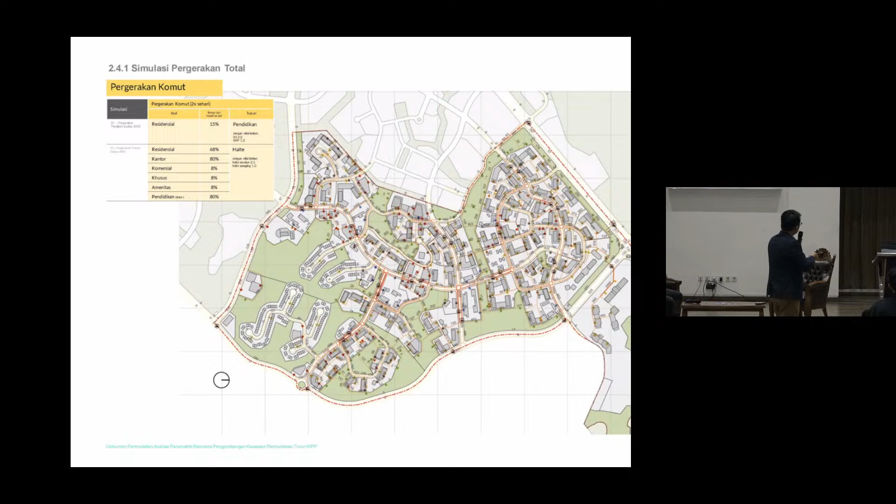And this is also another next-level thing that we do with the pedestrians. Remember, people will walk if there is better pedestrian quality, better dimensions, and also what we call the point of opening ratio to the segment of the street. When we open up more shops and interconnect the bus stations, placing them in strategic locations, we can tell which streets will be more occupied by pedestrians than other streets. So you can predict where people will move. This is where you can also put effort to ventilate this area, put more shading, bring the buildings closer, opening it up.

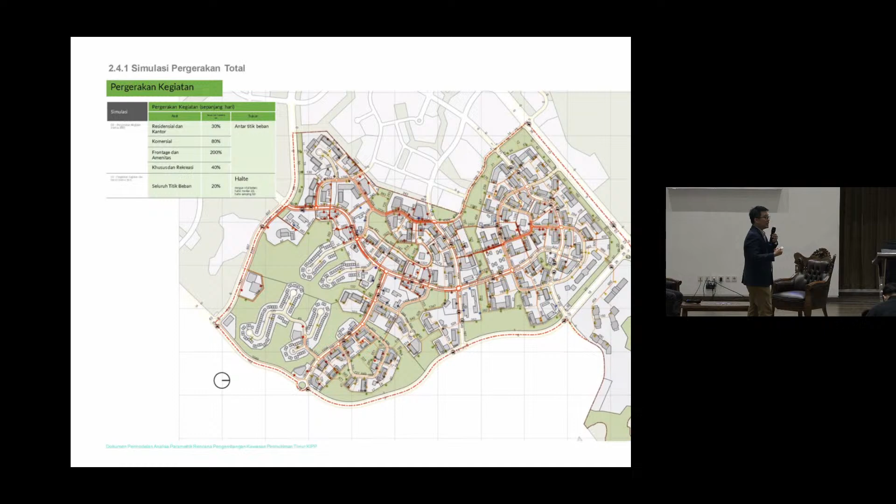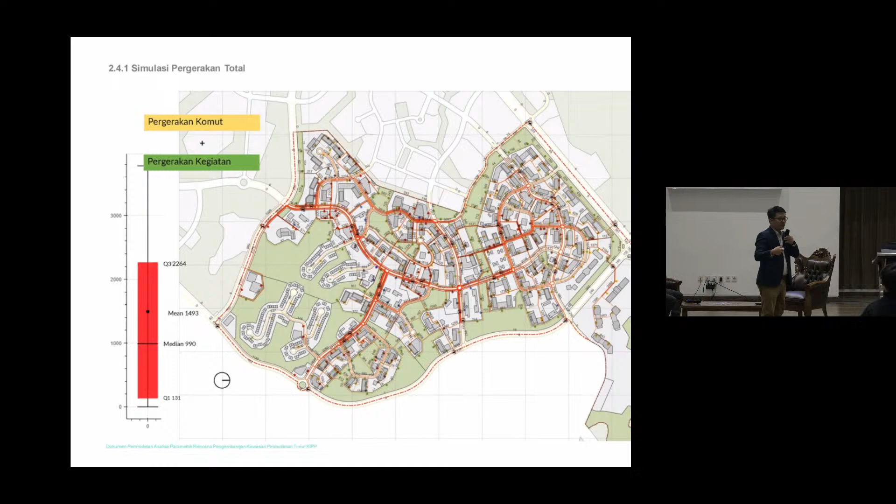Every little dot in there means it's an openable or accessible edge. It means you have McDonald's in here, you have Starbucks, you have Kopi Kulo, you have Gudeg Yu Djum. So if you open it more, people will walk. And this is what the modeling can tell you to create that kind of 10-minute city accessibility point. So we also have the metrics of what would be the desirable line, and what would qualify for the 10-minute accessibility point or not.

And this is the last one. If we already have all this, I think in this MOU today we also talk about BIM, right Pak. Let's talk about BIM at the city level. Let's talk about smart dynamic modeling of topography, grade and geology, urban design, smart infrastructure and transportation, all into what we call the dynamic performance-based urban design guidelines.

So if we can model all this according to the KPIs of this: 10 minutes, 80%, 2 degree temperature reduction, this one is 50% renewable, it has to be 100% now. So all of this can be constantly upgraded, constantly recalibrated to create a very robust city, so that over time you can make a roadmap of what you can achieve.

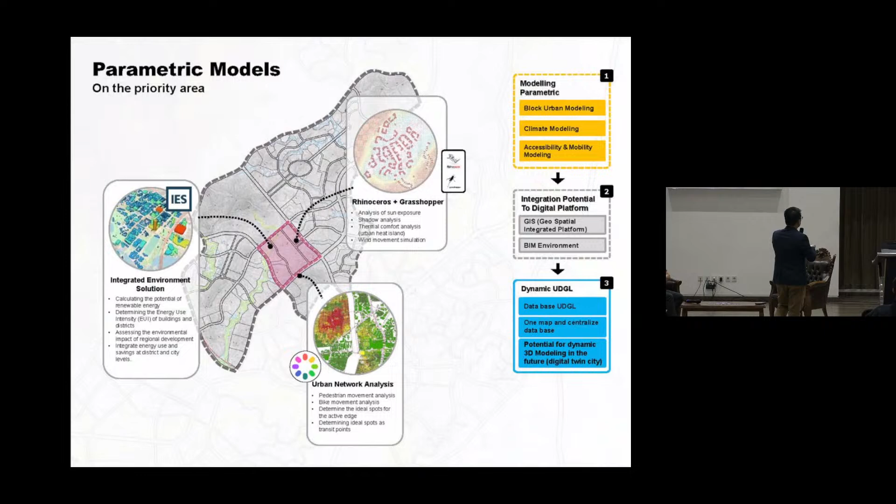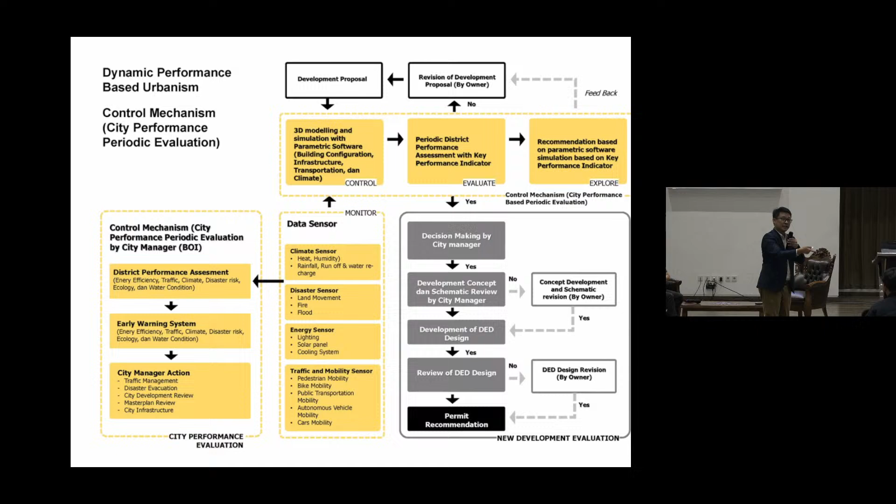Imagine if everything is already on the digital platform, you can populate all this data and create IoT using sensors. For example, if the temperature today is 41, and a new building gives shade, it drops to 38, and with a wind corridor it becomes 36. But if a new building blocks the wind, the temperature goes back up to 40. You can measure it, create a KPI that says this building destroyed the performance of the other, and make sure the third building doesn't mess it up even more. So you can control the city in your hand because this area can do it. This is where the city can really be different, because it has an authority with full power to control what's going on in the city.

This is not Yogyakarta, which is also special in its own way, a special region. But this is also not Bandung, where you have to go through the DPR and many agencies just to look at data. Here we can populate the data from day one, even starting now.

So we can create, for example, a roadmap toward a 2 degree reduction, based on the performance of each building coming in at different stages of time. If it's not doing well, we calibrate again and re-enter the target to create better performance at the next level. That's it, thank you.

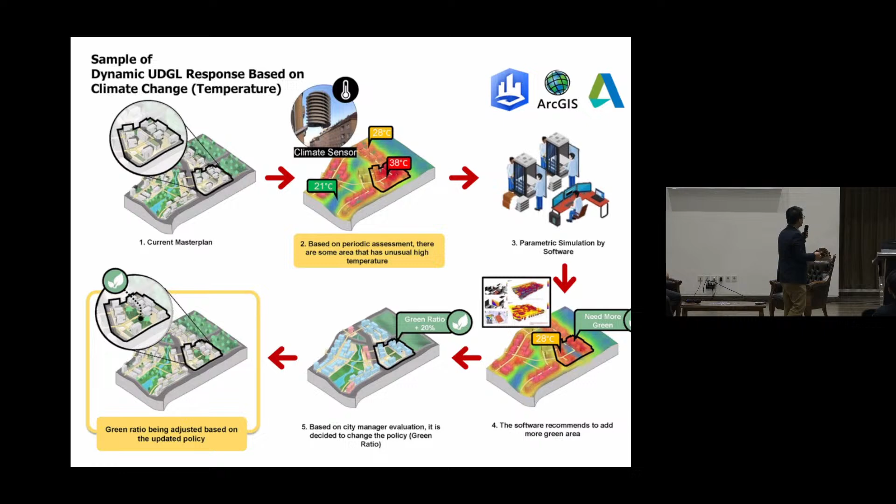One last bonus, you can watch this. This is not only happening in theory anymore, this is already happening on site. So the model with the wind and everything is already starting to happen.

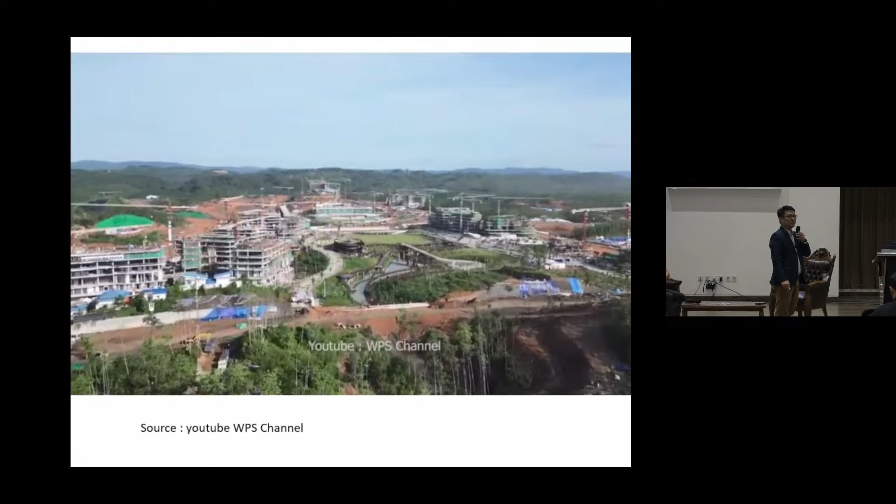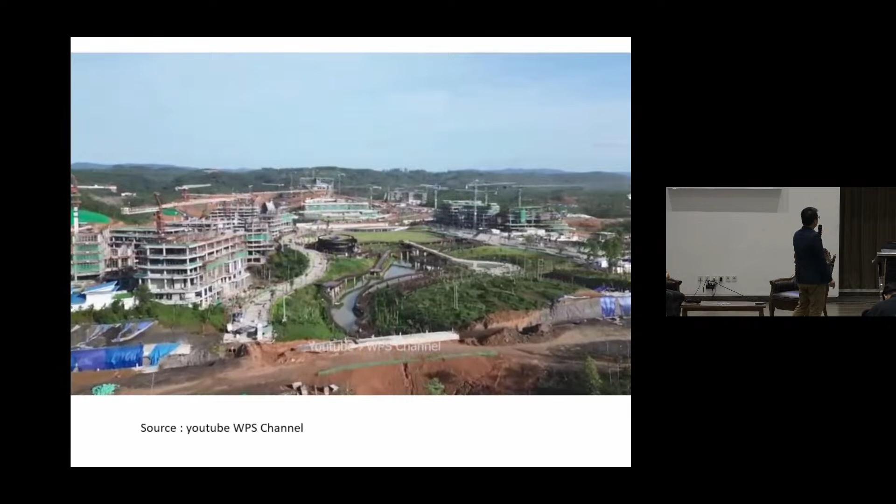In 3 years. I still remember 3 years ago all of this was still a drawing on my dining table, alone, without any friends. But now we already have it built, and this is ready for the 17th of August, National Day.

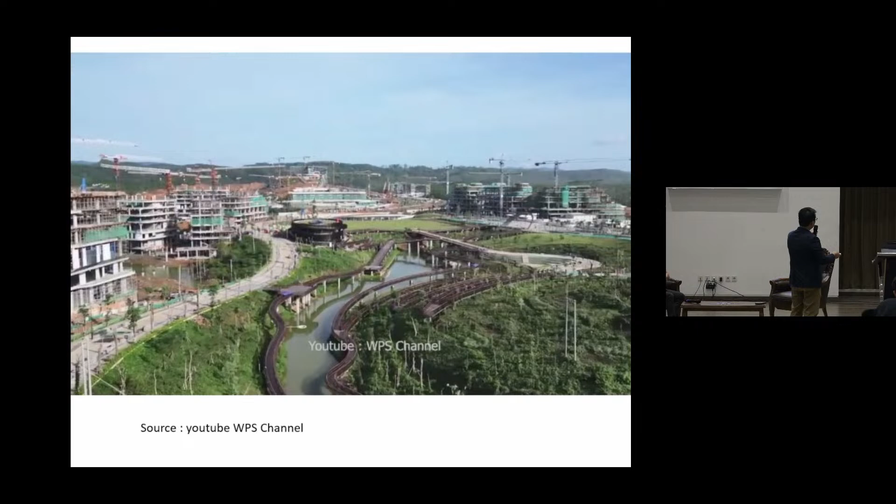So from here to here, this is not rendering anymore, this is the scary part. From the drawing to this, again, one little piece of information.

We are not building on primary forest. We are building on production forest of acacia and eucalyptus, the paper trees, which by the way are cut every 3 to 4 years for harvest anyway. So there is a narrative from NASA saying the capital city is destroying the forest. Maybe true, but mostly not true, because if you go back 10 years you can see they kept cutting it anyway, even without the IKN being there.

But the difference now is that with the IKN, once we're done, this is the 6,000 hectares that we did. So those books that nobody reads, that's actually a cluster of this that is already being managed and organized based on performance and based on land use. But guess what, it's already happening on the ground.

So the road is already starting to be cleared, 80% of the road is already there. One way to see it is, yes, it's good progress according to the plan, but others say you're destroying the environment, you're not sensitive to nature. But in reality, all of this area, except the riverway, we don't touch. This area was already disturbed to begin with.

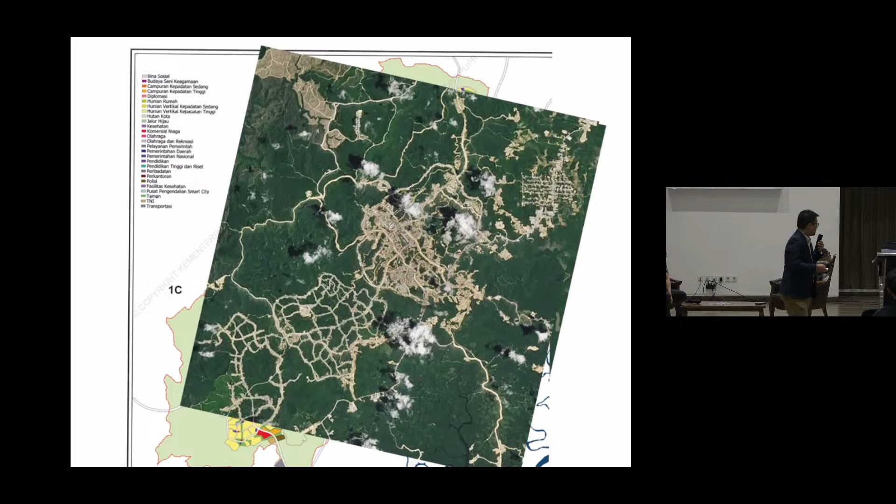So I hope that will be the end of it, but I have some discussion points. I prepared your question already.

The problem is the implementation. All of this requires time, patience, and money, because we're building a capital city that has more problems, with a politically driven timeline. If we rush things, in our industry there are three things you cannot have all at once: quality, time, budget. If you want good quality, you need good time and a good budget. In our political timeline, we don't have time, we don't have budget. Can we have good quality? No, right? So I'm not saying we cannot have good quality here, but we're living in two conditions that are already very hard to begin with.

And then there's the now and the future, that's the problem. The city we build today, that we are building for tomorrow, is different from what we see today. The regulation we have today produces the city we see today. If we want a city that is different, can we stick with the same regulation?